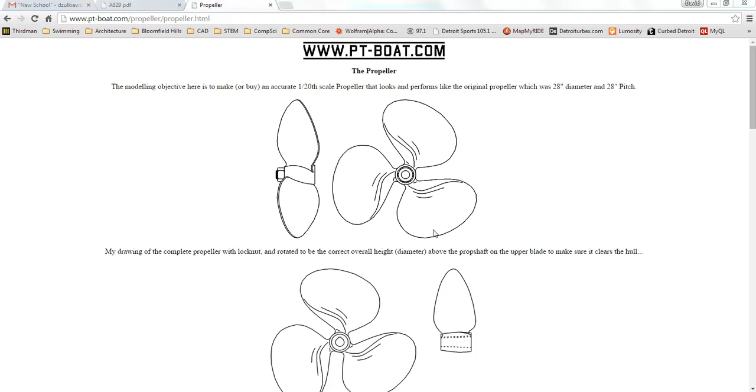First thing we want to do is open up Creo Parametric, and I'm going to close the web browser. I want to set a working directory. I'm going to go into the computer, click on my folder—I have several folders already created. You may want to create one for this class or this project. In here I have a folder created for Propeller, so I'll highlight that and say OK.

Next I want to go to File and New, or you can simply click on the New icon. We're going to create a part, and you can name your part. I'm going to call it Prop, and hit Enter. Next thing I'd like to do is set my units.

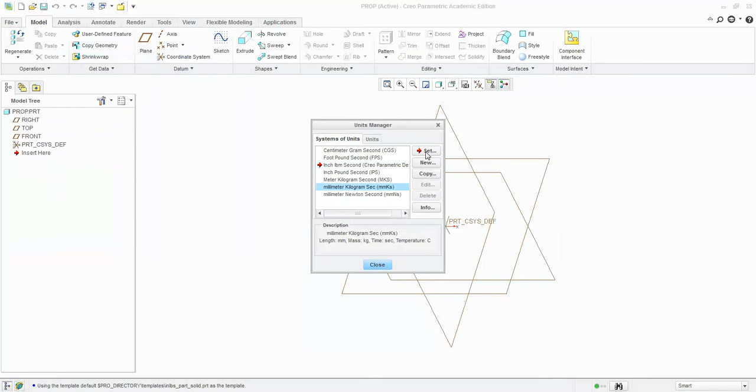Our 3D printer is going to print much easier if you set your units to metric, into millimeters. Here's how: go to File, down to Prepare, Model Properties, and the second one down has Units—right now it's set to inches, so I'll change this to millimeters. You'll notice there are two options; it doesn't matter which one, as long as one of them is millimeters. Click on Set, say OK, and close, and close. Now I'm ready to draw in millimeters.

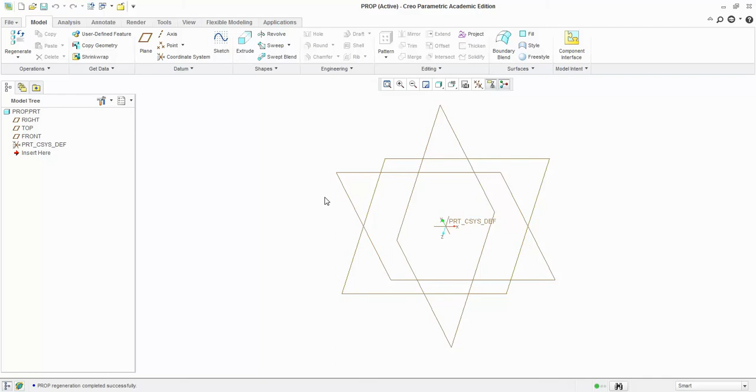First thing I want to do is create a sketch, and all the functions I'm doing in this tutorial use external sketches, meaning I'll sketch something and then perform an operation on it. I'll go up to Sketch and select one of the work planes—it doesn't matter which one right now. I'll click on this one, which is my right, and say Sketch. Notice my screen auto-rotates; if yours does not, come up here to Sketch View and it'll rotate for you.

The next thing I want to do is draw a small angled line that will be the pitch of my blade. Please understand the units I'm using here are not anything specific—you should have exact dimensions and do a little research and sketching before you select your dimensions. My dimensions are completely arbitrary.

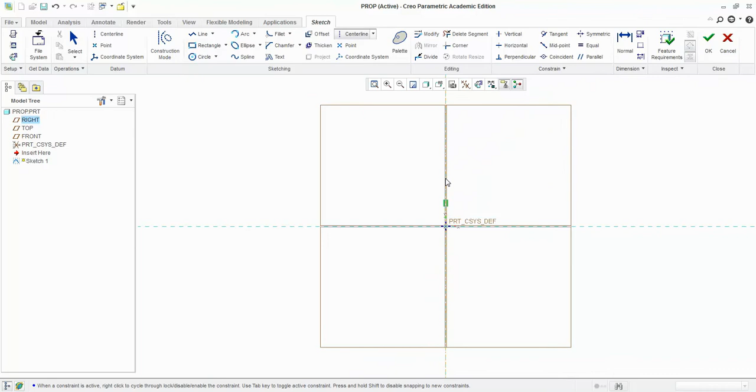I'm going to go in here, and the first thing I want to do is select a center line. I'll go right here to the XYZ origin, and you notice this orange dashed line—I want to make sure it goes straight up and down. Click again, and now there's a little dashed line that is my center line. I'll scroll into this area, go to the Line tool, and draw a small angled line. Hit the middle mouse button to close that operation, and you can see the little line right here.

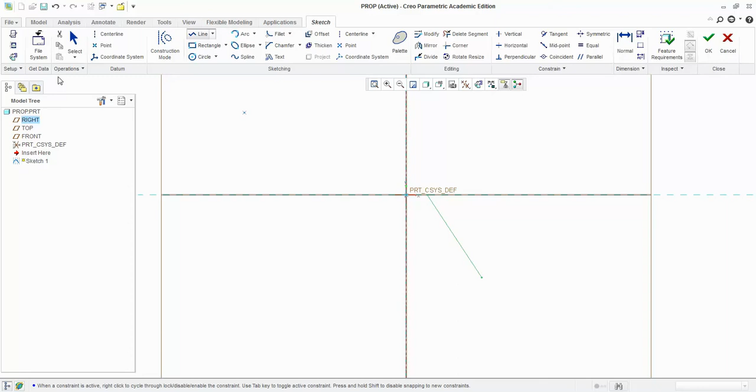I'll go up to the Select tool, and now you can see some dimensions—these are quite large, 78 millimeters and 21 millimeters. Again, make sure you have your dimensions set up. This 21 is actually going to be the center of the hub, so this is where our propeller shaft is. If you know the diameter of your propeller shaft, or the size of the stub that comes out of the motor, this would be a good dimension to set.

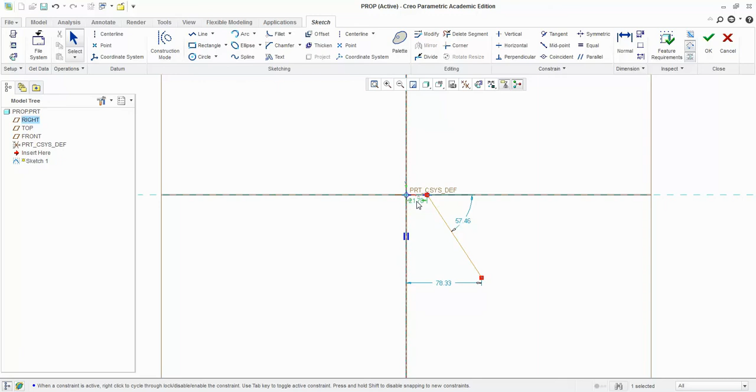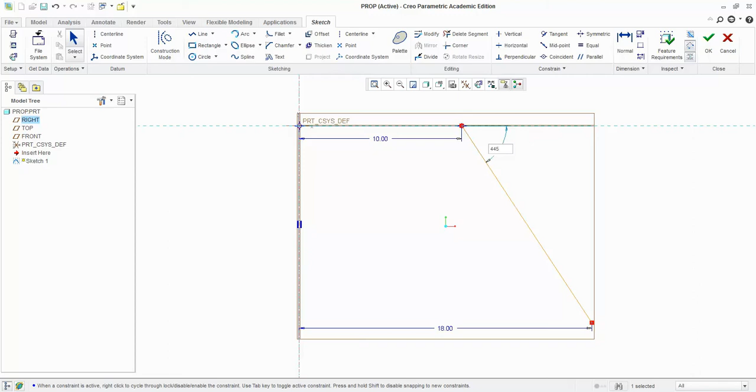So I'm just going to set this to 10, again completely arbitrary, and I'll set this one to 18, something a little larger. The angle is up to you—obviously different angles will give different performance for the blade. But I'm going to just make this 45, right down the middle. Not 445, but 45. And hit Enter.

So I have my small angled line and my dimensions. This looks good, my sketch is now complete, and I'll say OK. If I go out here now and hold down the middle mouse button and rotate, you can see my angled line, and over here will be my center line. So I want to revolve this.

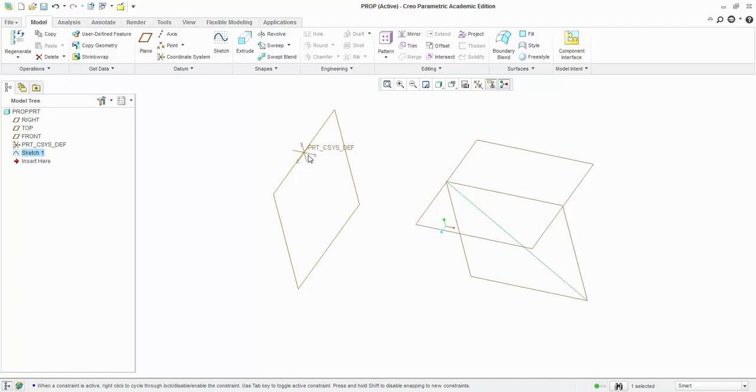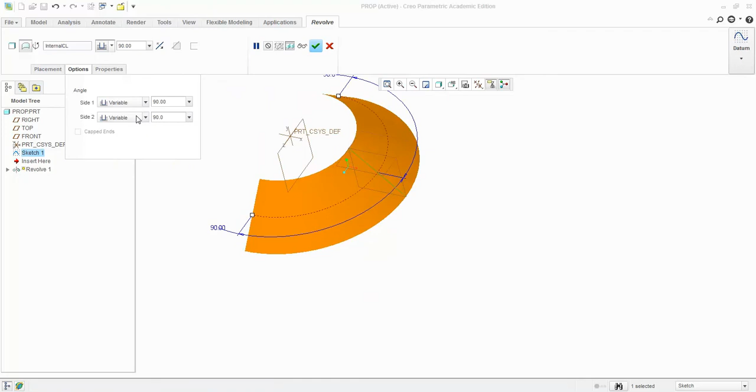I come up here to the shapes and go to Revolve, and I get this large orange revolve. I don't want the whole 360 degrees, so I'll come up to Options, and under Side 1 I'll select 90, then go down to Side 2 and also make that 90. That should be all set now, and I'll hit my green check mark to accept it.

Next thing I would like to do is work on the curvature of the actual propeller blade. So I'm going to put in another sketch. Last time I worked in the front view, and this time I'm going to click on sketch and select the top view.

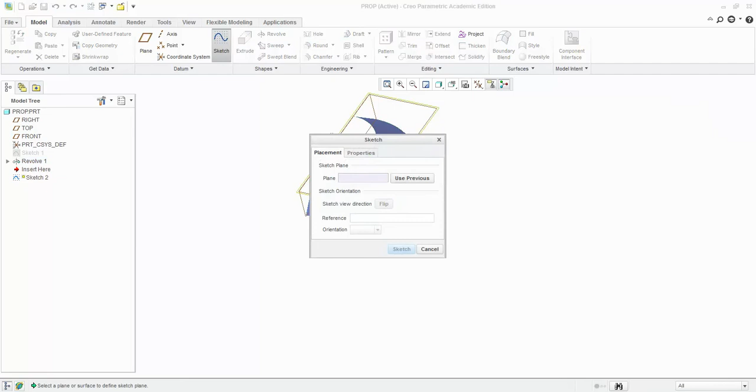If I hover over the work plane, you'll see that it says top. I'll click it and say sketch, and again it auto rotates. If yours does not auto rotate, come up here to the sketch view and click on that and it'll auto rotate.

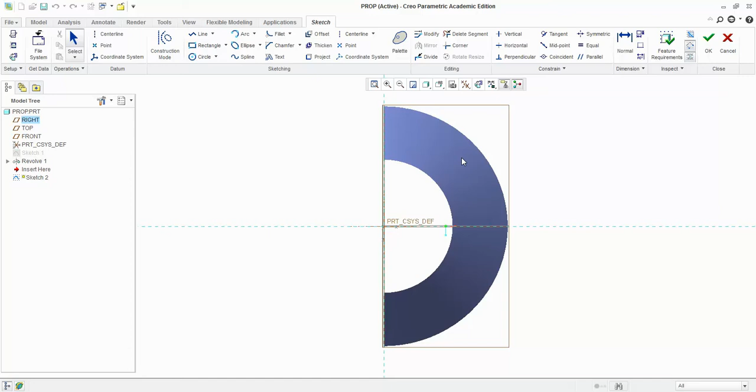Actually, we don't want to use the top, we'd like to use the side. I created a sketch that I don't want to use, so I'm going to hit cancel and say yes. I actually want to use the right, not the top.

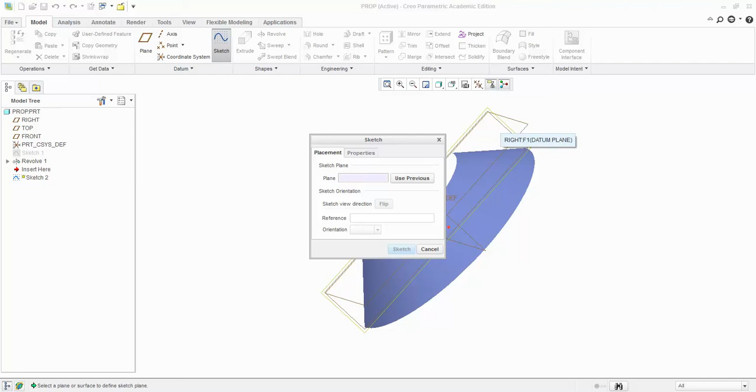So I'll do sketch again, and I'd like to use the front work plane. We used the front to begin with, and now I'm going to use the right side. Again, some different names for the planes. Apologize for the extra steps here, but we're going to use the right side work plane.

And sketch, it auto rotates. So what I would like to do is draw a curve. Over here where my cursor is, this is the top, or the outside of the propeller, and your boat would be over here on the right hand side, and the water would be pushing this way towards the left.

So I'm going to create a curve, and the easiest thing to do is click on arc, and I'm going to start up here somewhere. Again, I don't quite have any dimensions specifically, but I'm going to start up here, and then come down here. I don't want to go below the little angled revolve that we used.

I want to just stay inside it. I'll go here, and you can see I can flex my curve, my arc. I want to keep it inside my shape, I don't want to dip below. I'd like to create just inside, and that looks pretty good.

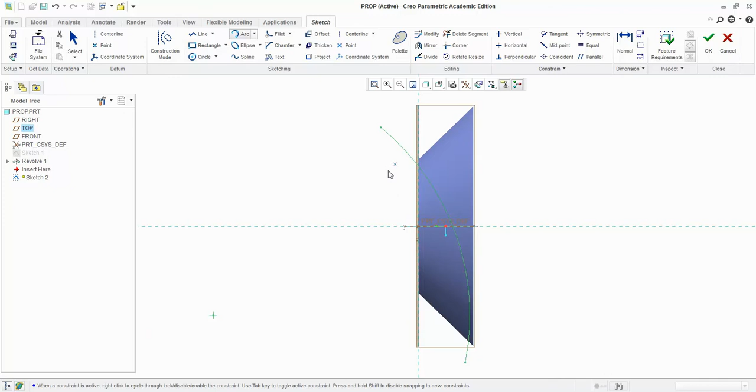Alright, we're all set there. My sketch is now complete. You could add dimensions by clicking on select and updating any of these dimensions if you would like. Again, I don't have any particular dimensions, so I'm just going to say OK.

Now, again, hold down the middle mouse button and rotate. You see that arc is there. And we would like to extrude that arc.

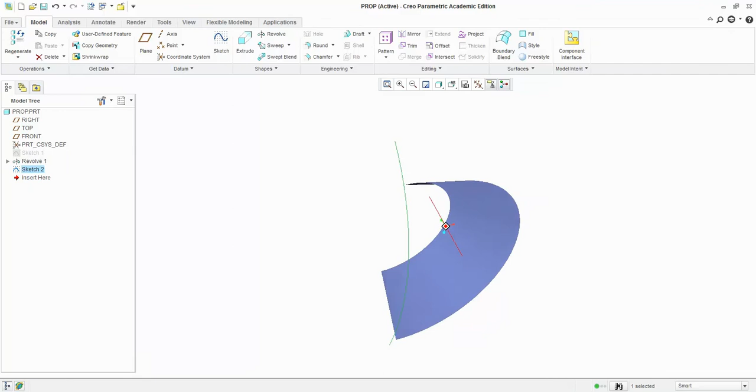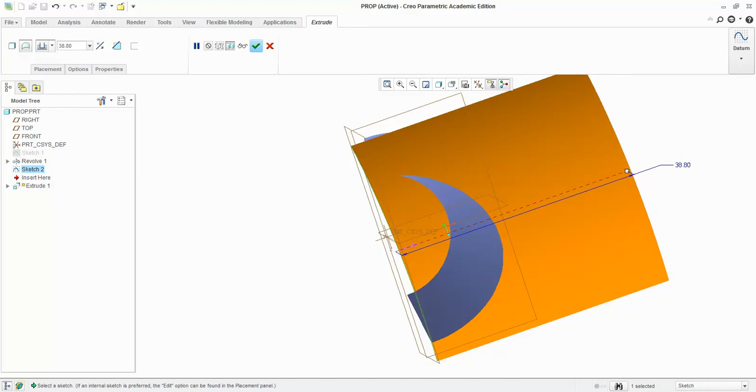So I come over here to the extrude button, and you see it gives me a preview. I'm holding down my middle mouse button to rotate, and I want to drag this way out here to the right side. You can go as far as you would like, this is basically going to be the width of one of your blades, so the farther the better. Again, I don't have any particular dimension, so I'll click right there, and I will accept.

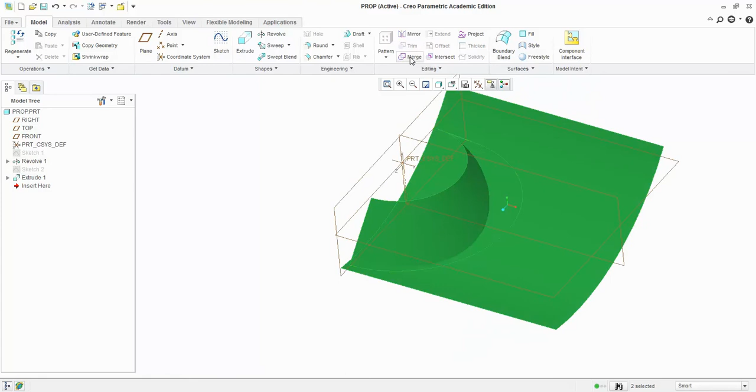Alright, so next thing I would like to do is merge these two pieces. I will click on one of them, and it highlights green. Hold down the control button, and click on the second part. Now you notice they're both green. Come up here to the merge button. Looks good, and then say accept.

Notice that it has now cut itself out around the curve that I created, and now we're ready for the next step. So now I'm actually going to draw the shape of the blade. I'll go back into sketch.

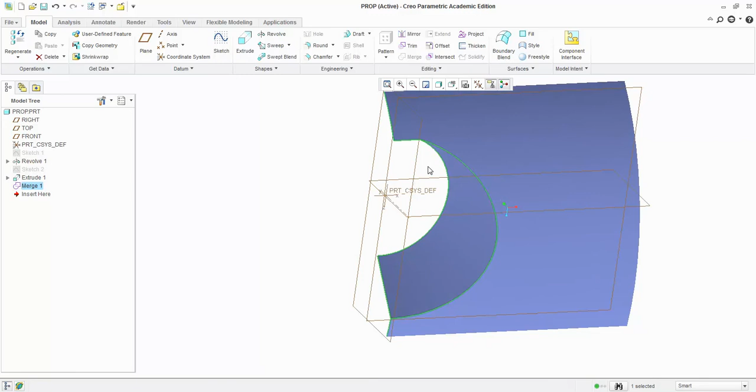And then I would like to this time now use that top work plane. So come over here to where it says top, say sketch. Alright, and now I'm going to go ahead and draw my blade over here, the shape of my blade.

I'm going to use a center line to help me create my blade. I'm going to come over here. This is one of my work plane lines. So I'm going to come over here and snap this so it goes vertical.

Alright, and then you can use any tool you'd like. You could use spline, I'm going to use arc to start with. And right here where the curve and the center line that I just drew connect, I'd like to start there, but notice that it doesn't click on it.

So what I'd like to do is create something called a reference. Click on the select tool, hold down the right click button, and then the reference button will show up. We'll move this up out of the way. I want to click on this curved edge right here, and see how it says edge? I'm going to click on that, and now there's a small dashed line in there, and I'll say close.

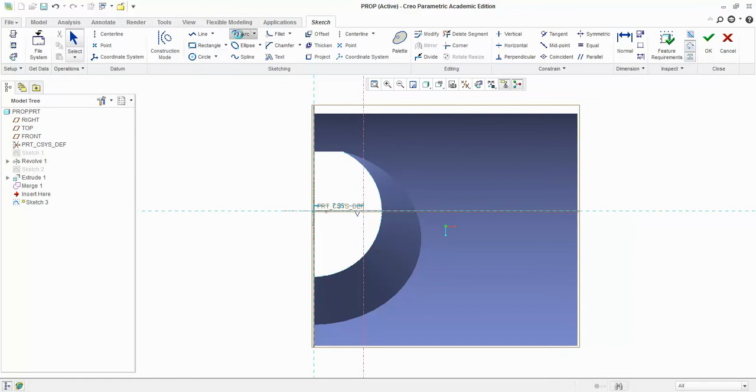Now when I select the arc tool, I'll come over here and notice that it snaps right to that intersection. So I'll click here, and now I'm going to create my blade design. You can see I can flex this curve in all sorts of dimensions and directions. So I'm going to come over here now, and I'll come way out here.

Okay, we're getting just a random type design. Maybe from here now, maybe I want to come over here, back to where the two intersect, and just want to do something like that. I don't know, just some crazy shape.

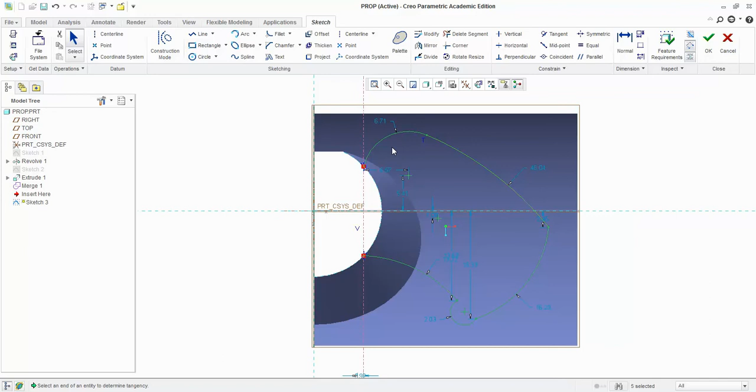Okay, now you notice maybe this isn't exactly what you want. So if I want to get rid of anything right now, it's all highlighted green. I could just simply hit delete, and let's try that one more time. Alright, just for some practice, I didn't like the way the shapes look, so I'm going to click, and then we'll click again, click, and maybe we'll come way down here.

Don't go outside that blue shape because that is the end of our part. And we'll click around here a little bit. Okay, I don't know, looks a little bit better. I like that one better than the first one.

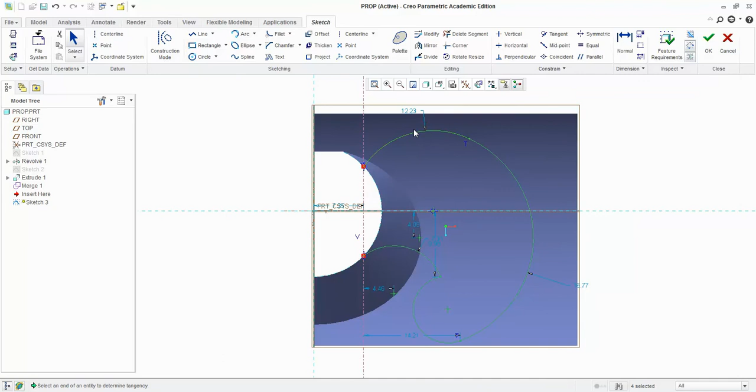So if this isn't the way you'd like it, again, you can hit the select tool. You could change some of these dimensions, or since it's all highlighted green, just simply delete them all. If you want to delete one particular segment, come up here to delete segment, and notice when I go over to each segment, it'll highlight green. You could delete one or all of those parts.

Okay, I'm going to come in here before I leave. I don't like this sharp edge, I want to round this out a little bit. So I'll go to arc, and I'll select just two areas, and I'm going to bring that in just a little bit so it's curved. Alright, nice smooth curved surface.

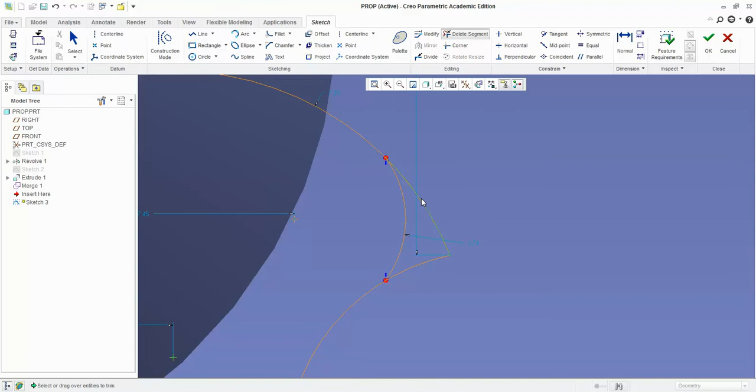Now what I'd like to do is delete these two. So go to delete segment, delete, and delete. And if I zoom out, that looks a little bit better. Alright, so I'm all set, that looks good to me. I'm going to say OK.

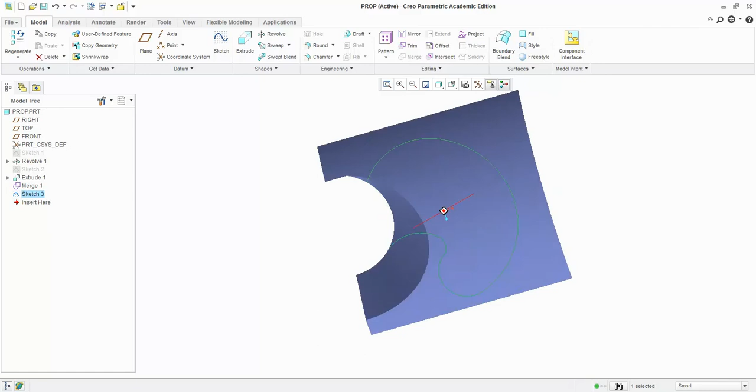And now what I'd like to do, alright, if you notice my little green shape is floating there, and what I would like to do now is trim out the part. Before I can trim though, I have to extrude. So I'll click on extrude, and notice that the extrusion goes up. Okay, well I'd like it to go in both directions, up and down. So over here in the drop down, you click into the second one, and it'll extrude on both sides of the work plane.

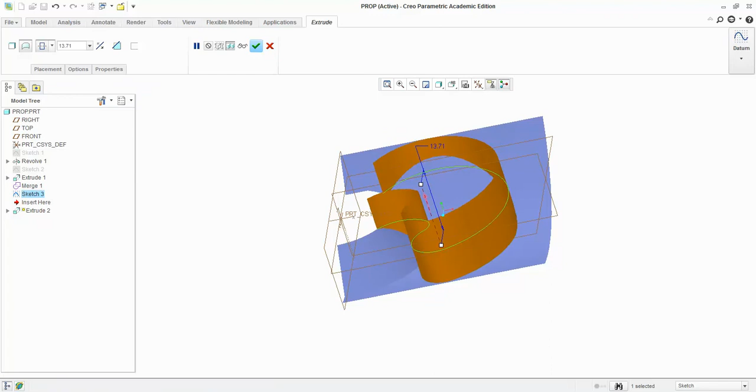And again, just drag this really, really far away. Okay, so make sure it takes care of all the areas. Looks good, say accept. Alright, now I got a whole bunch of stuff, and I need to just get this center part. I just want this for my blade.

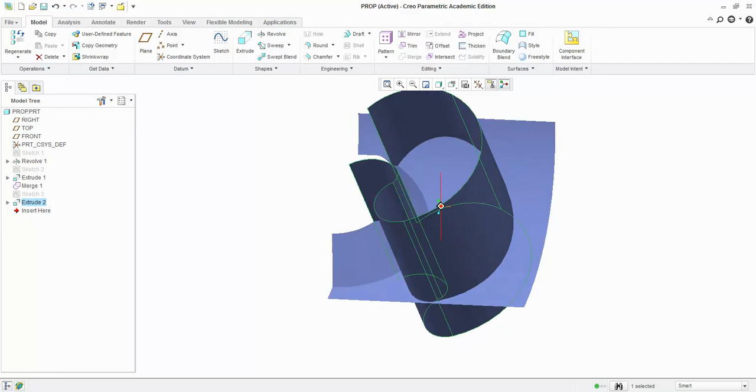Alright, so what we'll do next is trim. So what I'll do first is click this curved surface, notice that it will highlight green for me. And then go to trim, click on the extrusion that we just created, and then there's this purple arrow. It's pointing out, I want it to point in.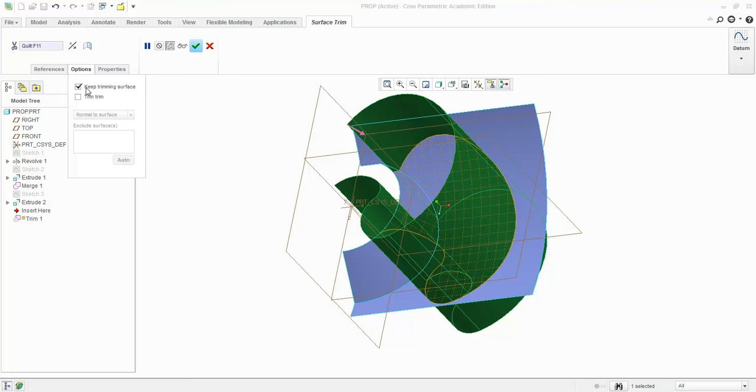And the next thing I would like to do is come over to options, and where it says keep trimming surface, uncheck that. Say accept. And now we have our curved center of our blade, and then our blade itself. Okay?

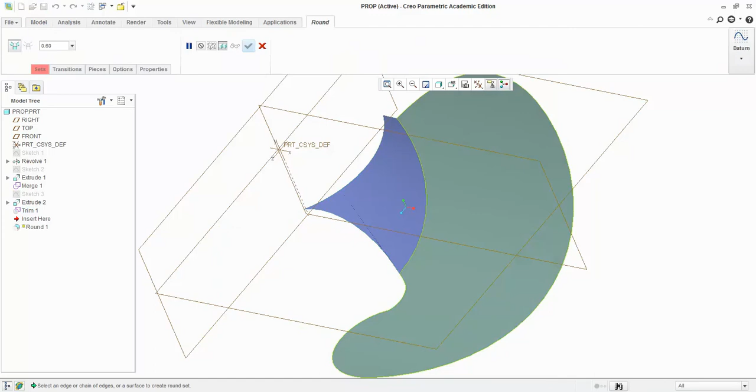Looks good, alright, I want to add a few more features here. This is a pretty sharp edge right here, so what I'm going to do is add a round. Right here is the round option. Click on the edge where the two surfaces come together, and I'm just going to drag these two squares to something that I like. You could come up here and type in a number if you'd like, maybe 1.25, and accept. That's kind of huge, alright?

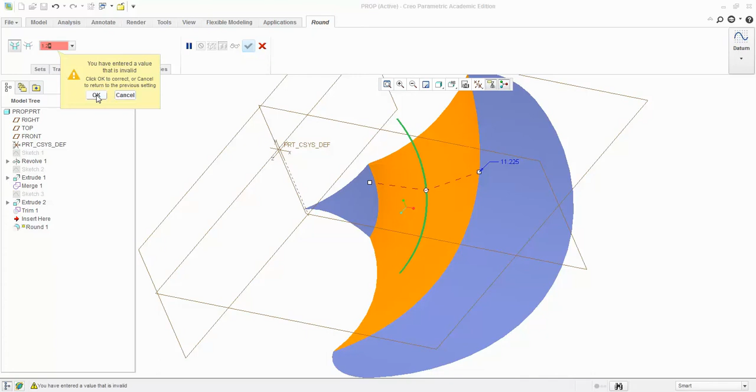And see, my keyboard added a few extra digits. 1.2, oops, 1.25, and say accept. And that looks good.

So we'll say the green check mark. Okay, so now that surface is curved, looks pretty nice.

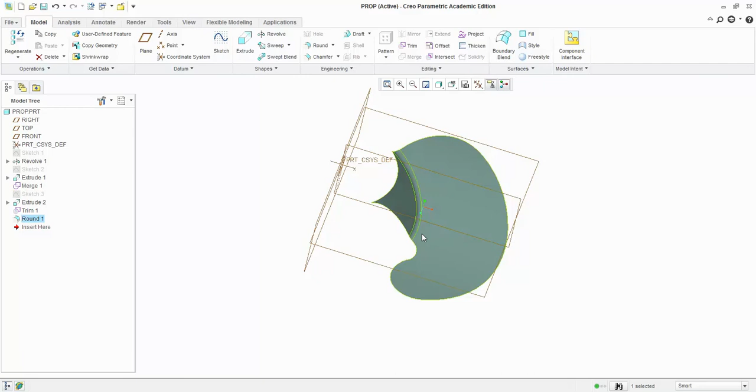And the next thing I would like to do is pattern this. Right now I have one blade, and you have to make up your mind on how many blades you would like. This particular option here has 3 blades. You could have 4 or 5 or 6 or whatever you would like. So I'm going to have 3. So I'm going to go up here to pattern, and notice that the pattern is grayed out, but I can go to pattern and go to geometry pattern.

Next thing I would like to do, you notice that there's a small dashed line here in the center, and it's called axis A1. I'll click on that.

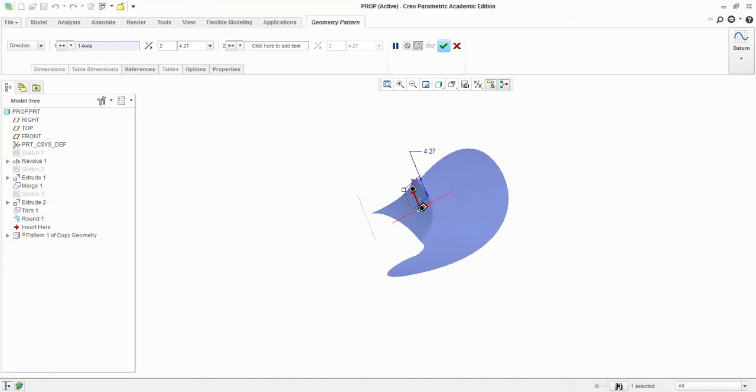Alright, what I'd like to do is come over here to direction and use axis. And it took out my center line, so I'll click on the center line one more time. Right now it's set for 4, and each of them will be 90 degrees apart. I'm going to go with 3 blades.

I'd like them to be equal, and we could all do some basic math to figure that out, or why not have the computer do it and just click on this one here. Each of those is still set to 90, so I don't really like that. So what if I said 360 and enter? Now they're all equally spaced.

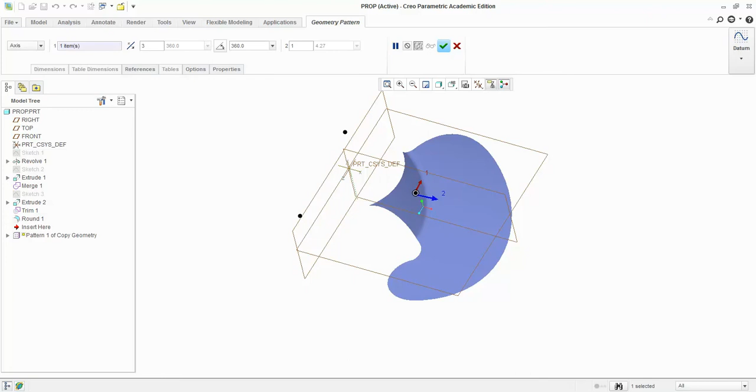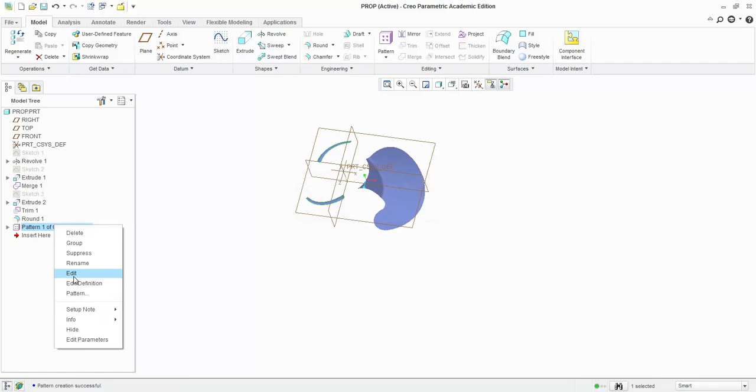I will say accept. Oh, well, this only patterned my curves. So I must not have had everything selected that I wanted. I'm going to go back and delete this. What I'd like to do is just delete the pattern if possible, and we'll see what happens here.

Alright, so I need to get this whole part put together. So how can I get all of these? You've got to make sure it highlights all green. Make sure that this edge, the curve, and the blade are all highlighted green.

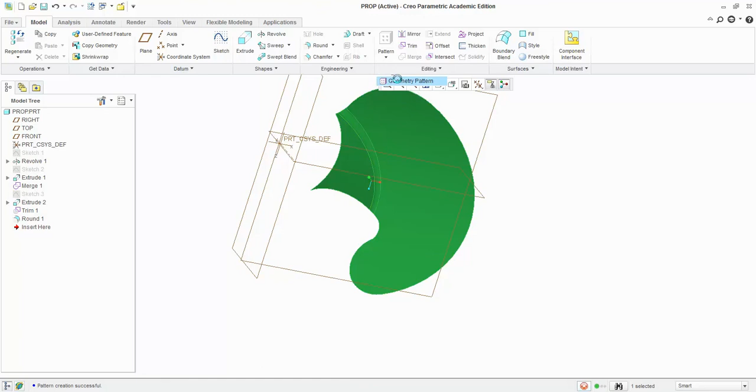Now we'll go back to pattern, geometry pattern. Remember we want to use the axis, and then find the center line. I only want 3 of these. Let's see how this looks. There we go, so now we have 3 blades.

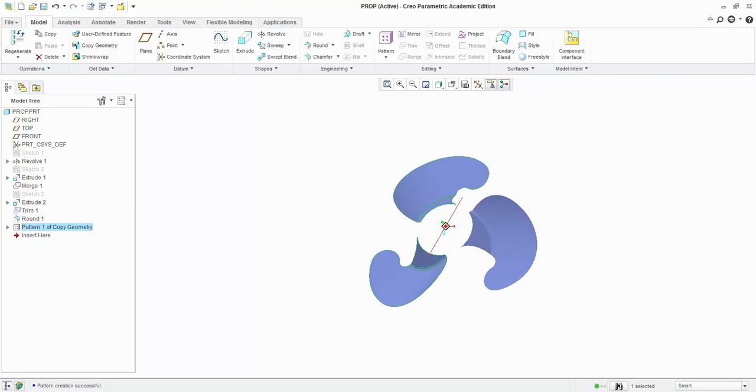Looks a lot better. We're getting there, but we need something in the center to hold all this together. So what I'm going to do is something called a fill. I'll come up here, and there's the fill option. What I'd like to do next is it's asking for some references and a sketch.

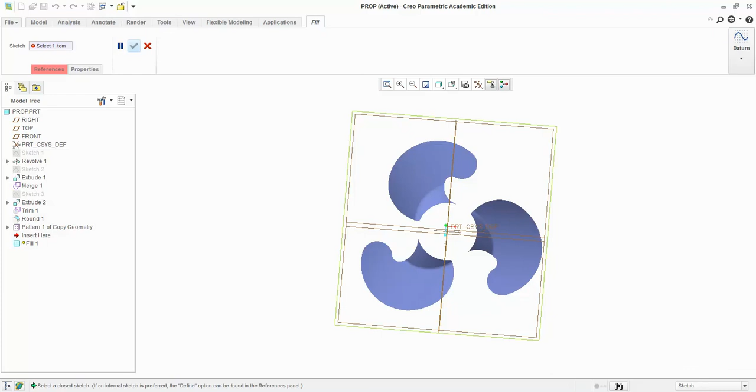So what I would like to do is select this top surface, and it'll rotate for me. I'm going to create the circle or cylinder right in the middle, where the propeller shaft will come into contact with the blades. I want to draw a couple of circles right now.

I want to use the reference tool because I'd like it to snap right to that curved surface. The way you do that: hold down the right mouse button, go to references, and click on that edge. You can click on all of them if you'd like, and they'll create references for you. Say close, circle, go to the center, and if I draw out, notice that it snaps. Boom, snaps right to it.

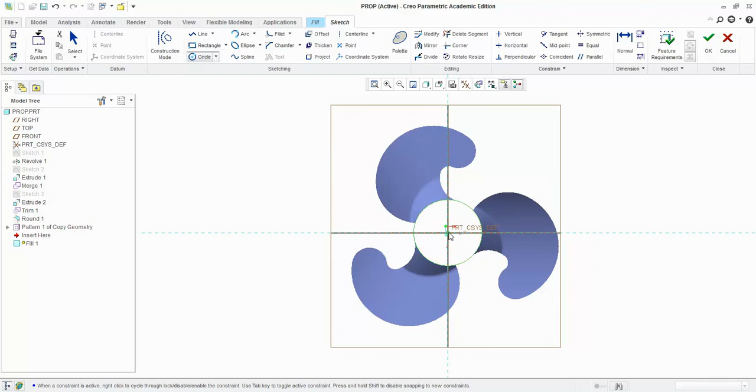I'd also like a center circle for the propeller shaft, so I'll set that up. Again, you can change the dimensions. You can see there's a dimension here of 7.9. Maybe I want to make that 8, a nice round number. That looks good. If you're all set, accept the sketch.

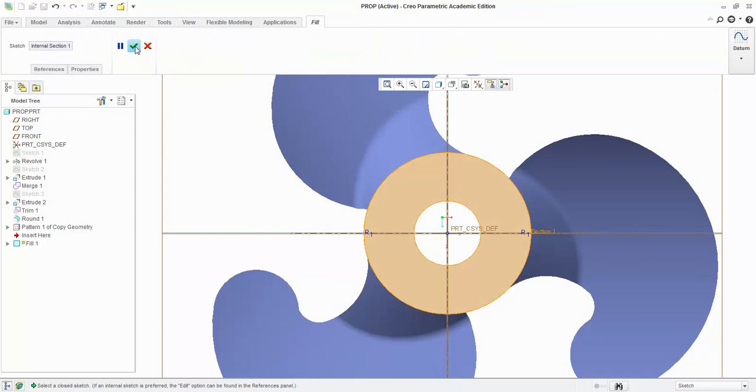Then in the fill, now it's asking, are you ready to go? Just simply say yes. Okay, so now I have a center hub, if you will, to hold all that together.

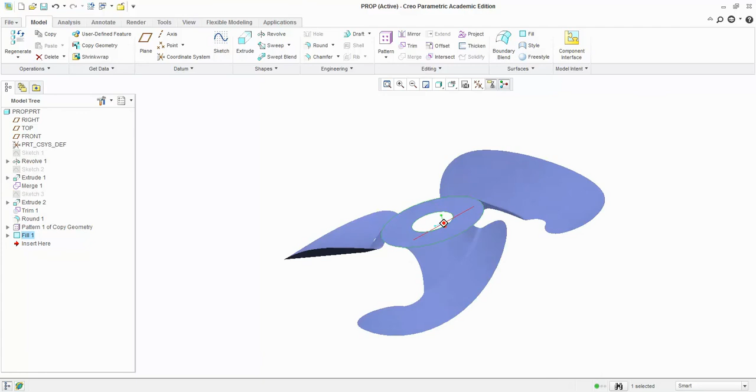And I need to now merge all 3 of these. Again, when I do this, I've got to make sure I get everything in green. So as I go around, I need to select all these. If I select this, now it's all green.

Hold down the control button, click on the next one, it's all green. Click on the third one, all green. Click in the circle in the center, all green. Then simply go up to merge. Everything looks pretty good, let's see what happens here.

We may get an error. And we did, it says feature failed to regenerate. So we're going to cancel, and say cancel, and just cancel the whole thing out for a second.

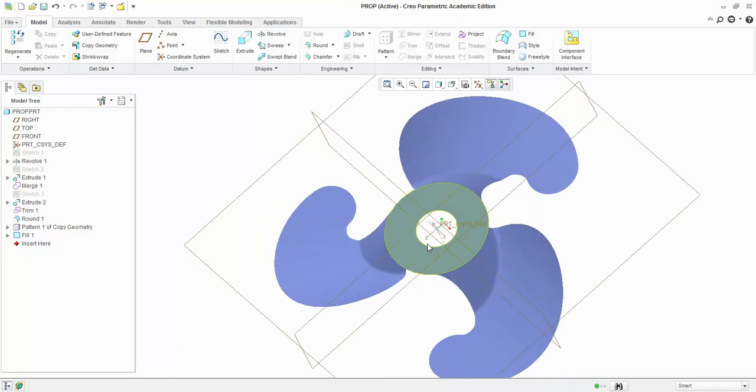What I would suggest doing, just to make this easy for yourself: let's get one, hold down the control button, get the second one, and then get the center circle. So right now those three are highlighted, this one down here is not. Say merge, accept. Now we don't get the error again.

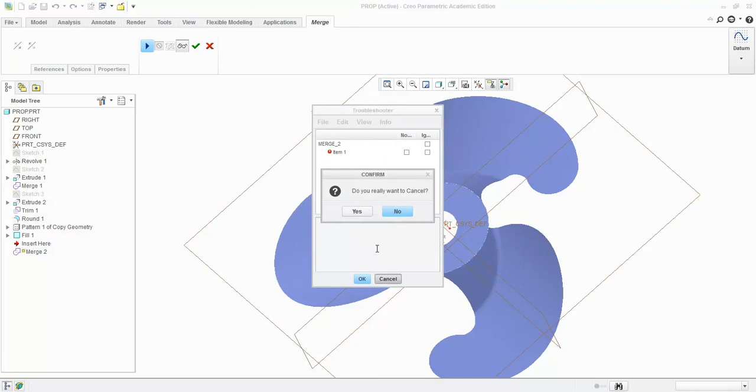So what you're going to need to do is just find the right first few that you need. So I'm going to try this one. Oops, now we got some errors because we got 3 copy geometries, I don't want to do that. So all I want to do is just select this.

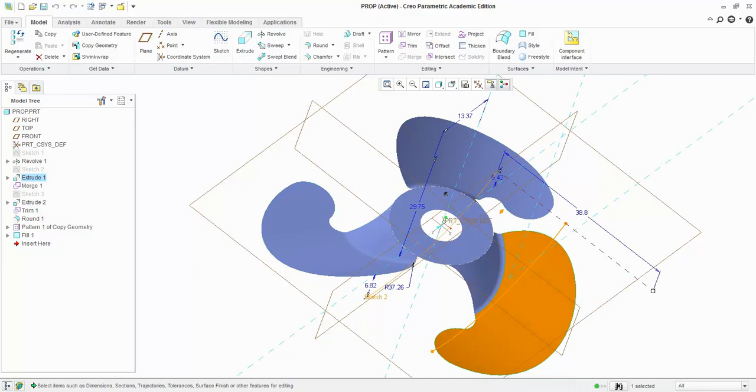Alright, so we're running into a few errors here. There we go, I got it green. Hold down control, let's do the center. And how about this one? And merge, and accept. Alright, that time it worked.

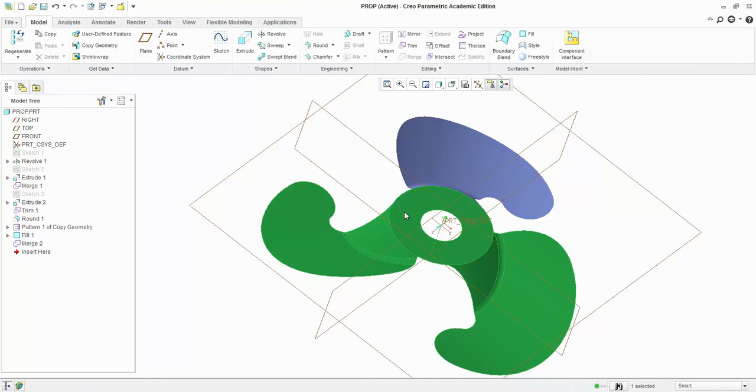So now what we'd like to do is click that center circle. Notice that this all highlights green now. Hold down control, come out here, click on that extra blade that was not merged, and merge it. Looks good, we'll accept, and now there's no errors. Why we get those errors, not quite sure, but now they're all merged together.

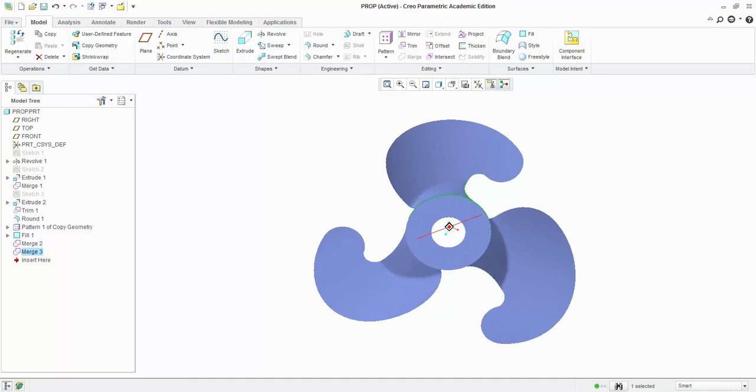Alright, I'd like to create a little bit of a round because I do want water to roll around the edge of the hub and then onto the blade. So I'm going to round this edge here. Go back to round, click on that surface, and again, you could drag this as big or as small as you would like.

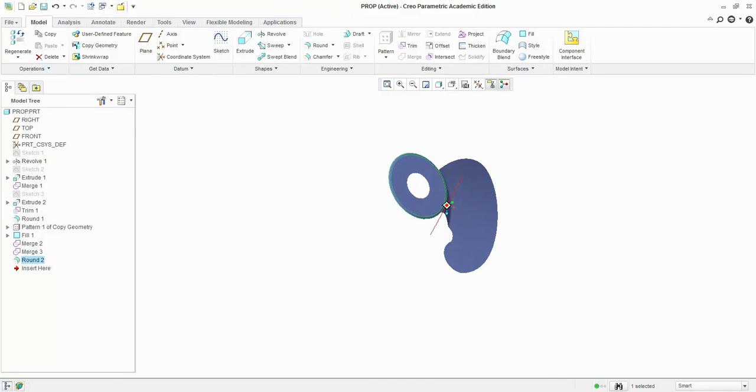Say accept. Okay, now we lost the rest of this. So what we may need to do is delete that round, and then it comes back. So if you can add that round, go for it. If not, no big deal. It may be because of this large gap here that we were not allowed to add it. So some of you might be able to do it. Ours didn't work this time.

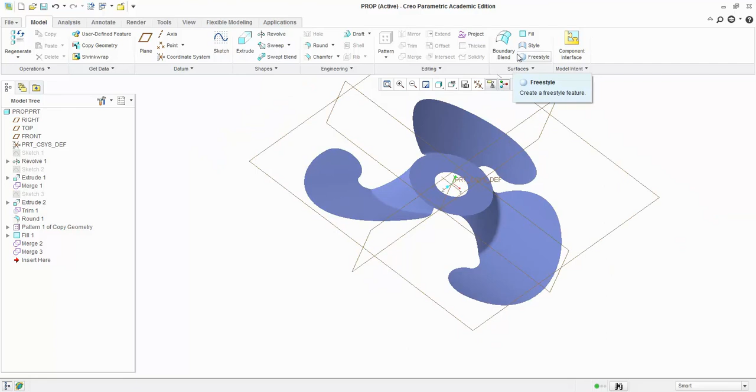Not a big deal. Last thing I would like to do is thicken this part. So how can we do that? Well, we want to find the thicken tool, which is here, and it's grayed out right now. So what I'd like to do is click on the whole part. If I can get it green, there we go. And then go to thicken.

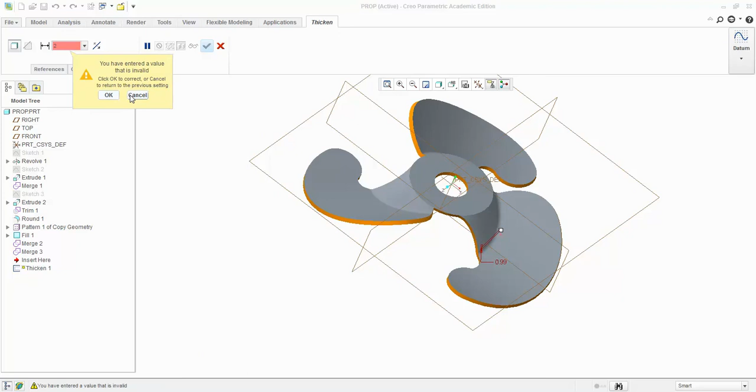Now you notice that there's an orange highlighted area that gives me a thickness, and right now it's 0.99 millimeters, so maybe 1 or 2 millimeters, whatever you'd like. And it tells me that I have invalid characters, so make sure that you have this set up to something that's acceptable. The geometry, the computer may tell you what it can and can't do. That looks good to me, and we'll accept it.

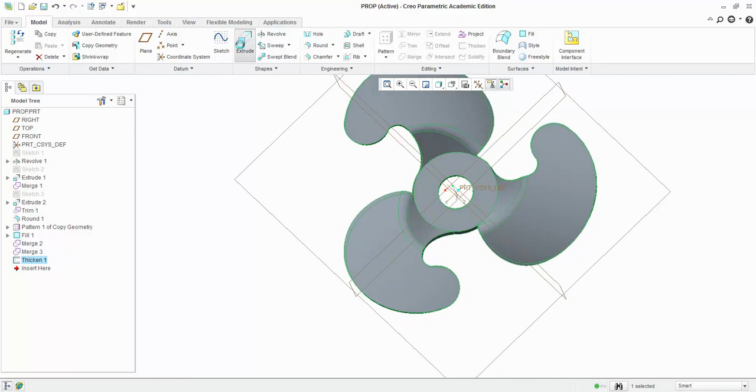And now I have a blade with some thickness, and I'm all set. Alright, last thing you might want to do is actually make your propeller shaft. So what I would do if I want to make the propeller shaft is simply extrude, and I don't want to put it here, this is the outside, so I'd like to put it inside here. I'll click on this surface. Looks pretty good. Right click for references, click on the outside, say close.

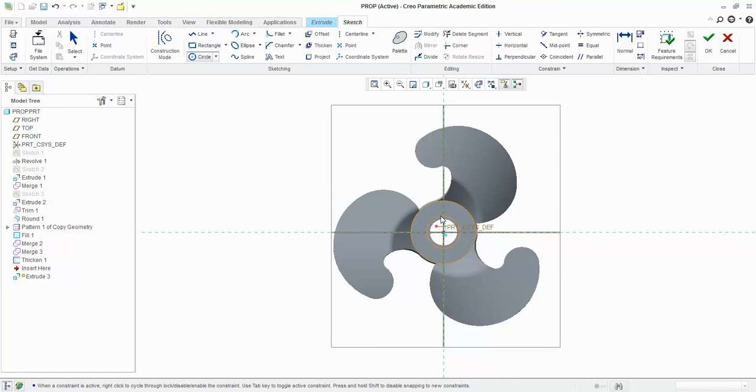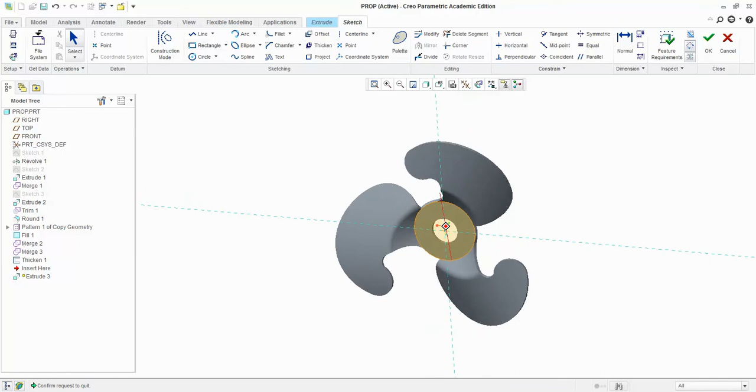And let's draw yourself one circle, and then draw another one again. Now again, notice that it's not snapping, so let's go back and add one more reference. How can we get that reference in there? Properties, alright, for some reason it's not letting me. No, I don't want to exit Sketcher. I'd like to add one more reference if possible, but it's not letting me right now, so let's see what we can do.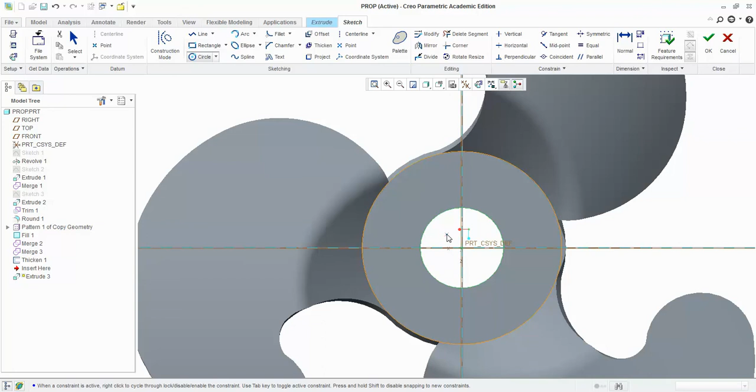The idea would be to simply hold down the right click. There we go, and now the reference is there. Not quite sure why. Alright, and I would like to select the little circle right there. Say close, I'm going to go back here. Remember this button over here, sketch view, click on it, and let's draw one more circle that is to that size. Again, this circle should be the diameter of the small little nub that comes off the motor. Say OK.

And there's my propeller shaft. Now I can set this to any length I want so that it can go through your boat and go all the way up to the motor. If you like the way that looks, say accept. And there you go, you've got yourself a little propeller blade. Alright, make sure that you save, and it's all set going into that folder that I wanted.

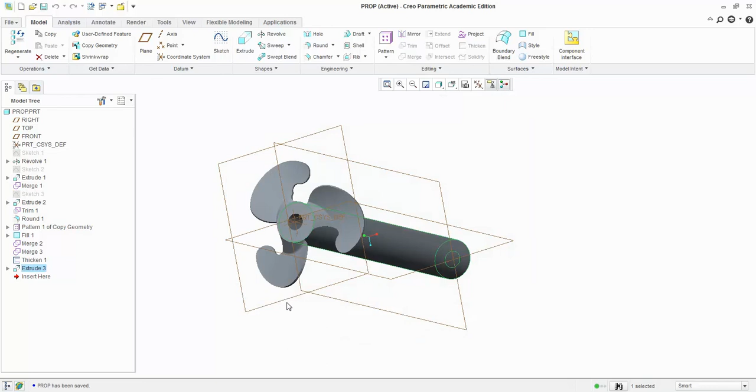The other thing we would like to do is set this up for the 3D printer. So go to File, Save As, and now down here where it says Part, scroll down till you find Stereolithography. You may have to scroll down a little ways, there's lots of options. Click on that, say OK, and now this little pop-up menu comes up.

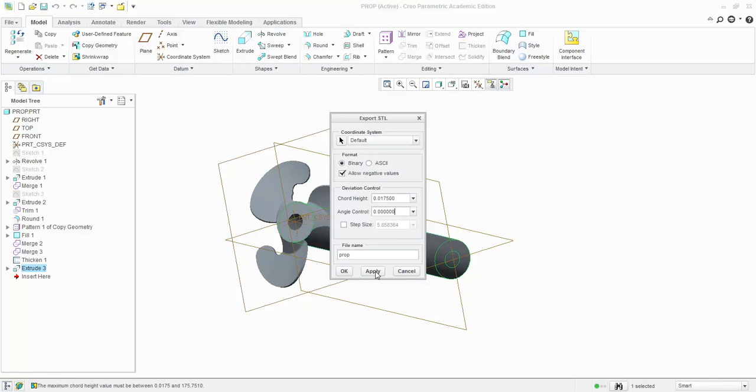Chord height, type in 0 and enter. The computer will do the math for you, and this is allowing us to make a smooth blade. Then go to the second one, say 0, enter, and the computer again will do the math for you. Say apply, and you'll see there that we've got the red pattern on there. That's how the 3D printer will set it up, very smooth surface. You can scroll in there and see how smooth it'll get. Some computers and 3D printers will let you get smoother, but this is the setting for ours.

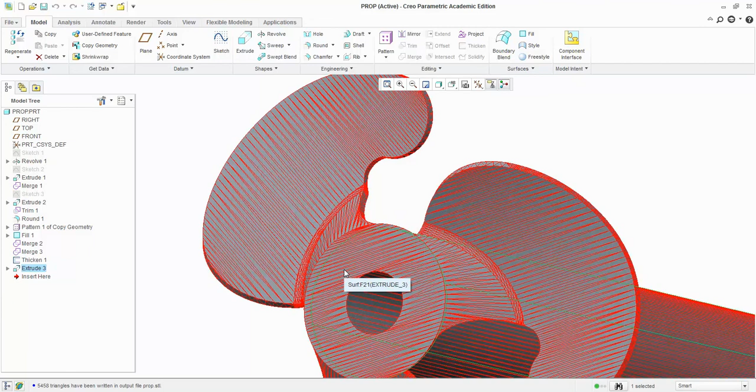And we'll say OK, and now it's going to save that stereolithography file, and that's the file that will print on the 3D printer. Good luck with this, and if you have any questions, please ask. Thank you.